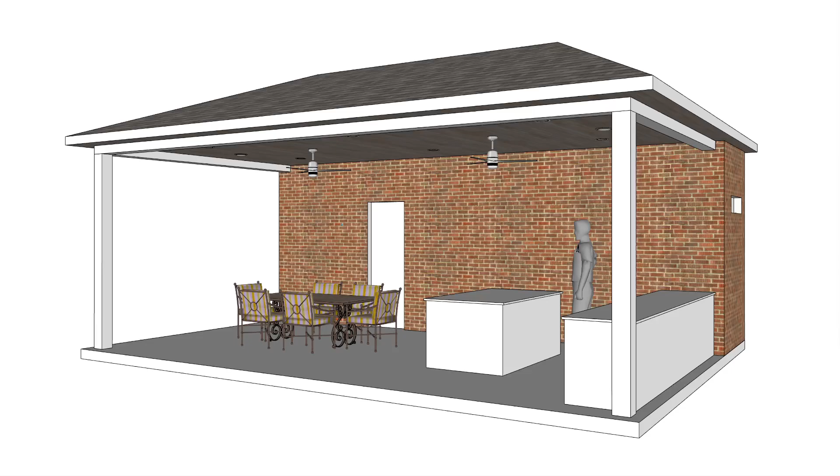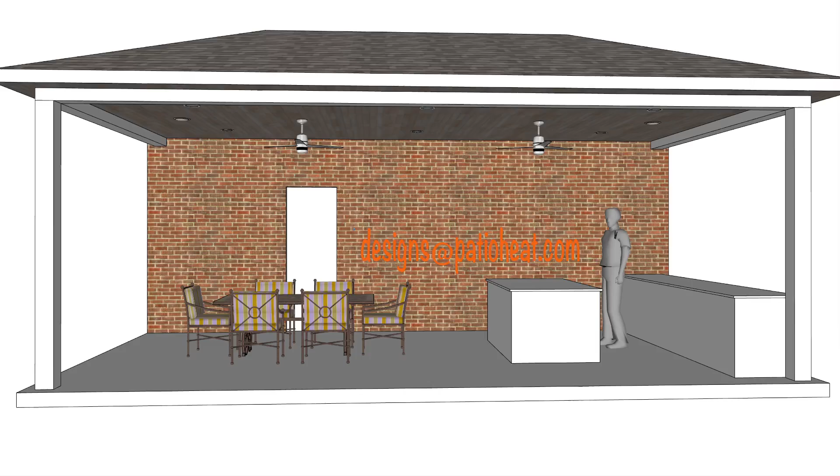All right, let's go ahead and take a look at this application. This is a residential application, and let's go first into the overall dimensions that I have.

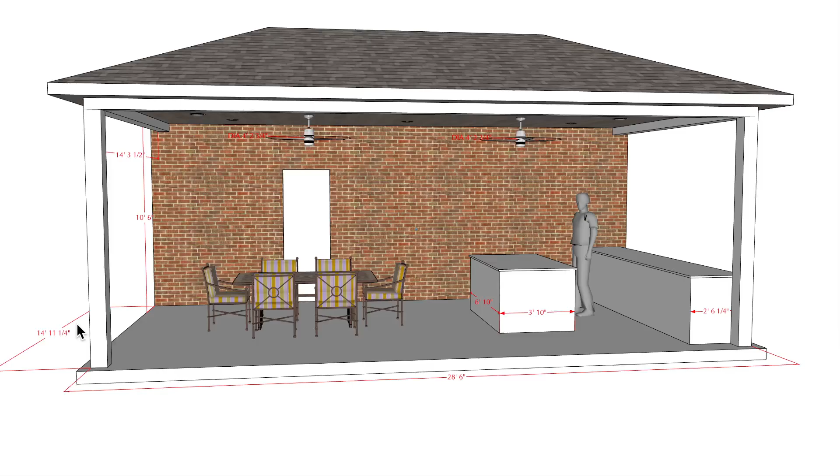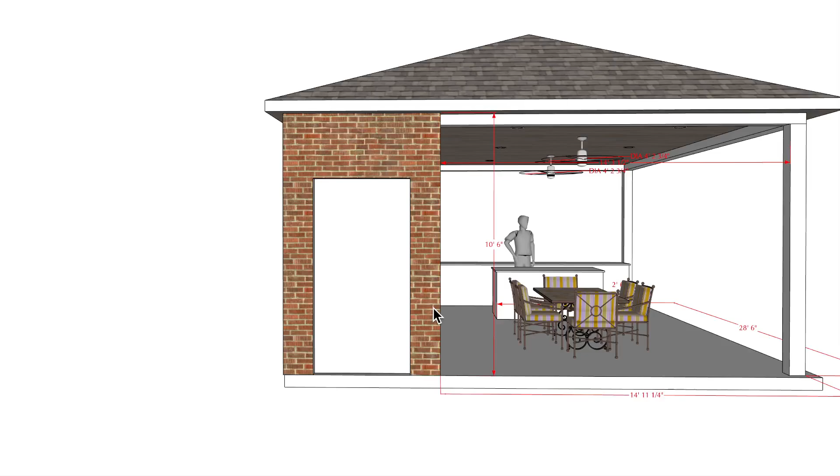So overall dimensions I have here at 28 feet 6 inches to the outside edge of the beams coming up here, or posts coming up here. And then I have from the wall here to the outside edge of the beam, or post rather, roughly about 15 foot, so 14 foot 11 and 1/4. I have a ceiling height of 10 feet 6 inches to the finished floor. And then this section over here, just so you can see, I have it at 14 feet 3 inches from the inside edge of the post to the inside edge of this wall here.

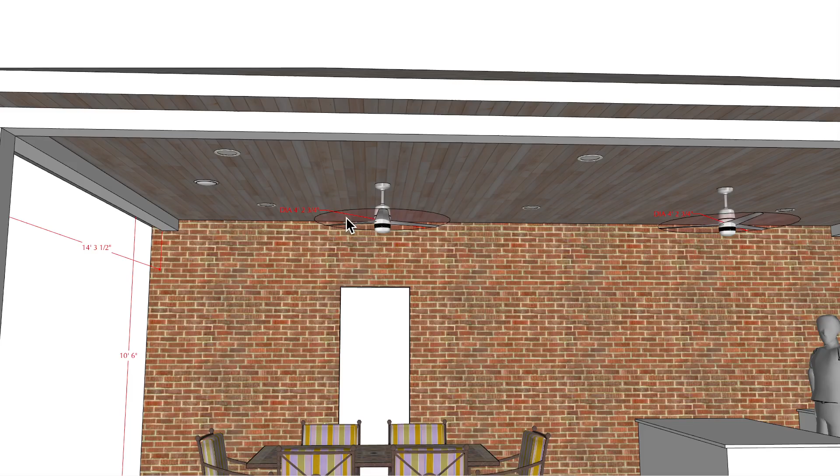The fans - they told me there's going to be fans located, 2 of them, in the patio structure itself. I have them at 11 foot center to center, so 11 foot from here to here. And the dimension I've made up is 4 foot 2 and 3/4 of an inch in diameter. Also, there's 6 sets of recessed lights as well as a speaker. I'll show you why I placed the lights and the speakers in the positions that I did here in a minute. I think that's about it.

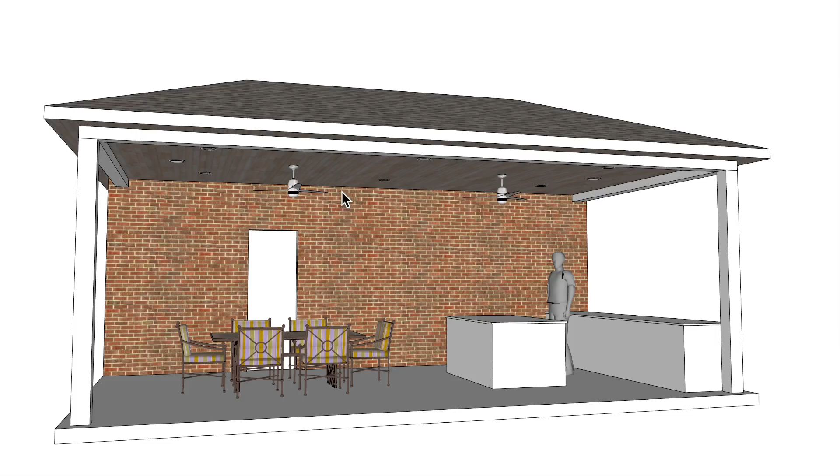So let's go ahead and turn that off and look at what I would recommend. They want flush mount units, but this is where I would place them. So these are the flush mount units. I have placed them here in the ceiling, and I want to go ahead and take off that ceiling so we can get a better look at why I'm going to do what I'm going to do here in a minute. So these are from here to here.

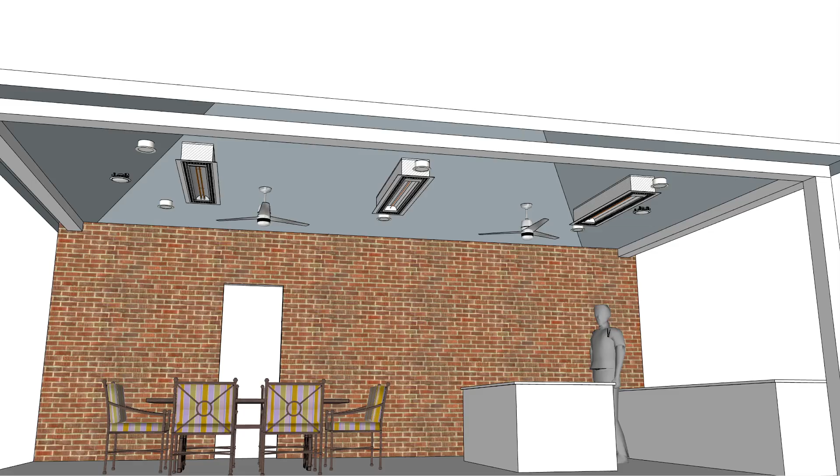I have this at 8 foot center to center. Let's see if I have those distances on here. So yeah, you can see that I have from the middle of the heater to the center of the heater, and this heater is centered within the patio structure itself.

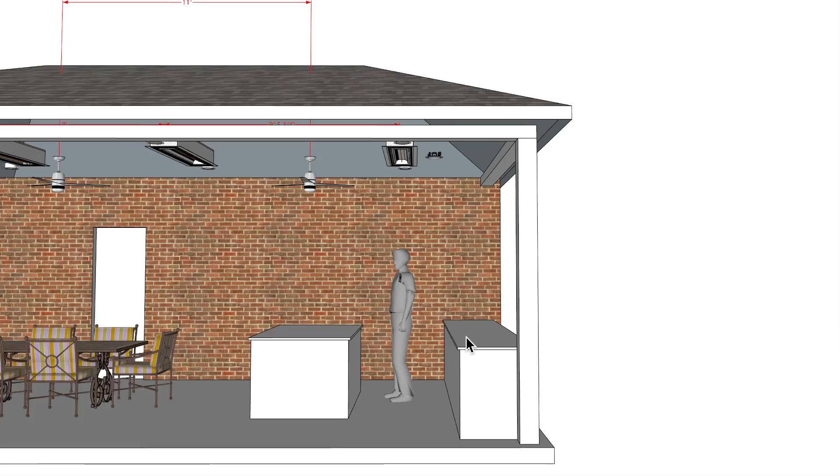I have that at 8 foot, and then from here to here, I have this at 9 foot 5 and 3/4 of an inch. The reason why I have that is because this is standing room over here between the 2 counters here, and if you were to place them at the same distance apart from each other - let's just go ahead and move this over here to the left, roughly 8 foot - you'd be heating up most of the counter space itself. Let's go ahead and turn that layer on so you can see. So we're putting almost half of the infrared light wave onto this countertop area here. So that's why I am choosing not to do that.

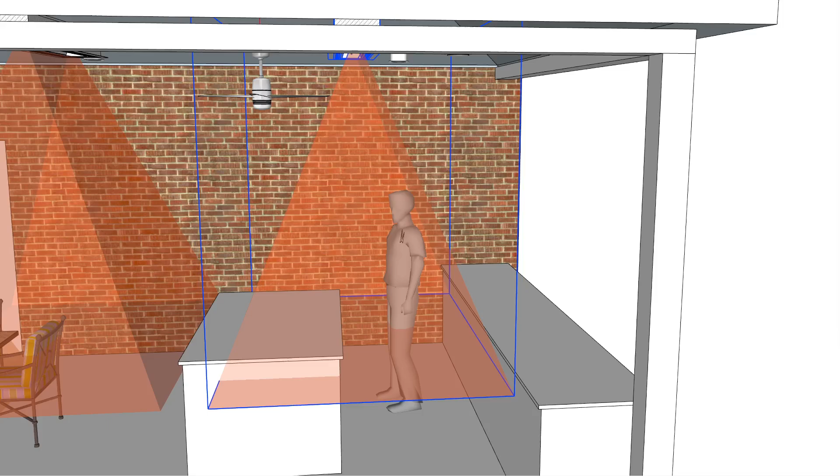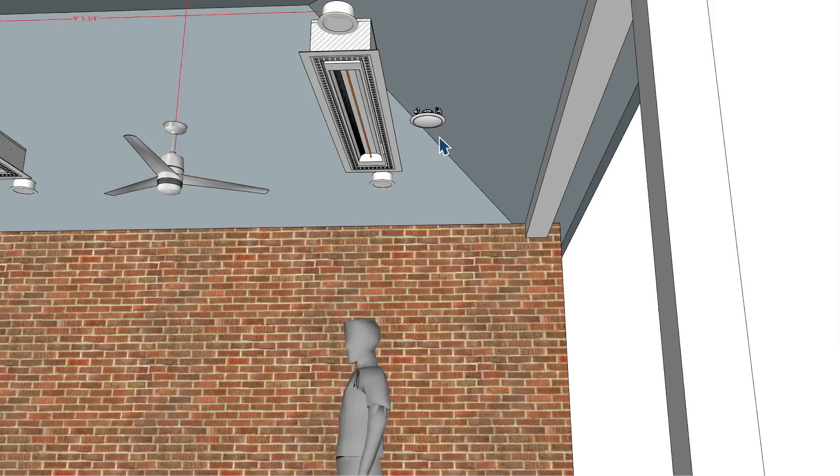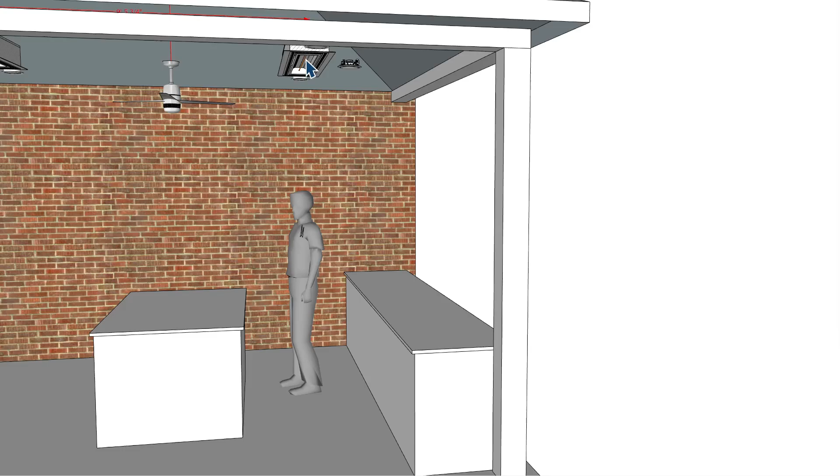So let's go ahead and put that back where I had it here for a second, and look at some of the other things we'll talk about. This is a 4,000 watt unit. The reason I'm choosing a 4,000 watt unit here is because this is basically standing room only. And if you were to use a 6,000 watt unit, then yes, you could, but you really want to have a control panel to where you can dim this down. You would probably never use it at full power unless it's extremely cold at some point. But I'm using this as a 4,000 watt because if you're sitting here at this counter cooking and serving things of that nature, then it would be probably way too hot at a 6,000 watt unit.

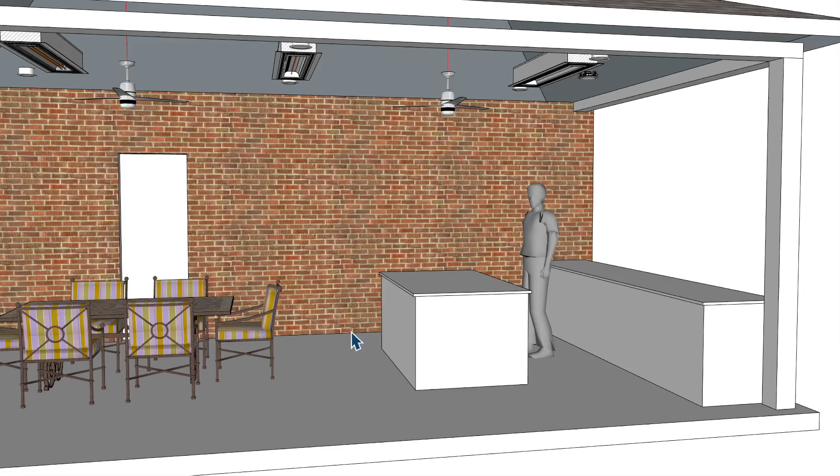Now this one here, I'm not 100% certain if there's seating positions over here or not. I moved this table - I did have it placed in a 90-degree opposite direction, but there might be bar stool seating height over here. And if you were to take bar stool seating height, let's go ahead and just throw a bar stool in here for a minute. Give me 1 second here.

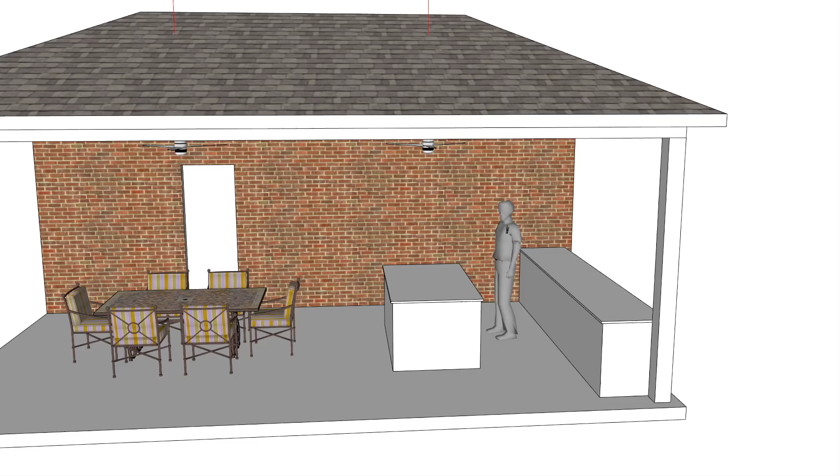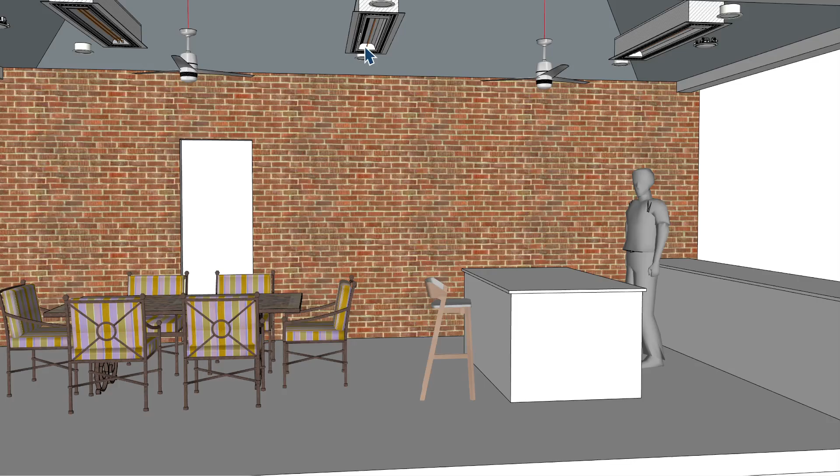Let me throw something in here real quick. If I was to put a bar stool here and you were sitting here, you can see you're sitting much higher than in a normal table-type position. So you're closer to the heater, and that intensity is going to be much more hotter. So you definitely want a control on a 6,000 watt unit, and you can see this is a dual unit 6,000 watt, or a 4,000 watt if you're not going to use a control. That's just something to note.

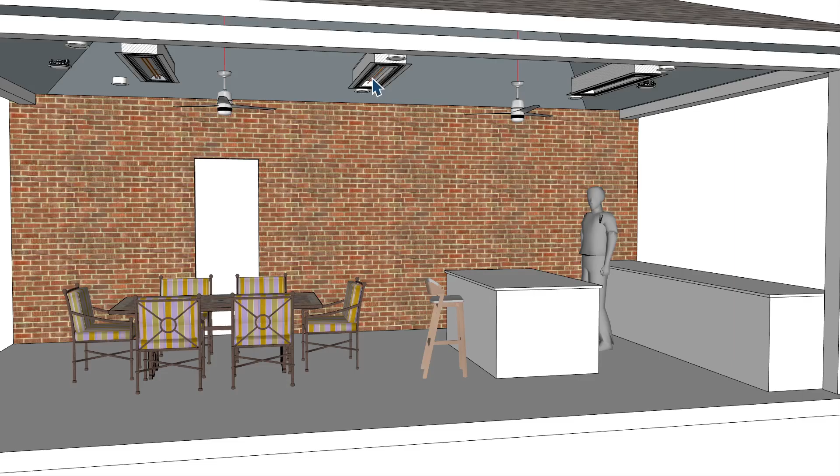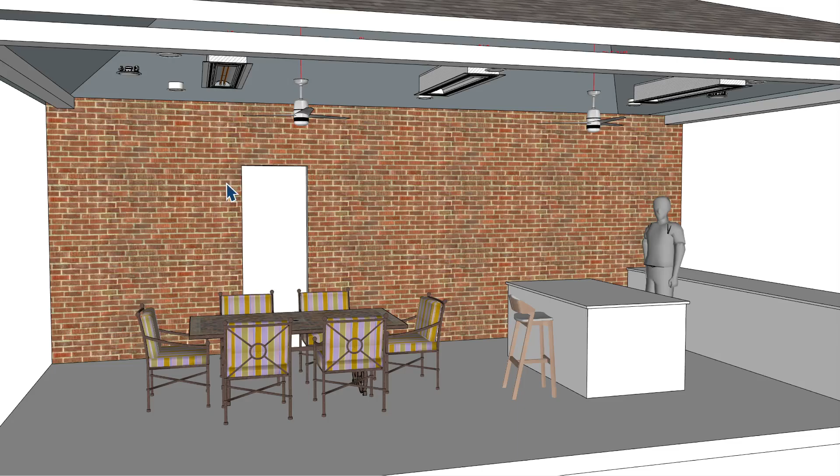4,000 watt at the 10 foot 6 inch mounting height is kind of pushing it for bar stool seating, so I'd probably want to go with a 6,000 watt heater here and a control system. If you utilize this with a 6,000 watt unit, a control system is kind of a must. 6,000 watt here, sitting in a normal dining space at 10 foot 6 off the finished floor is probably ideal, and you'd use it at the higher output. A control system really makes the whole system comfortable for whatever weather and temperatures you're experiencing. Now let's look at this issue with regards to the fan location.

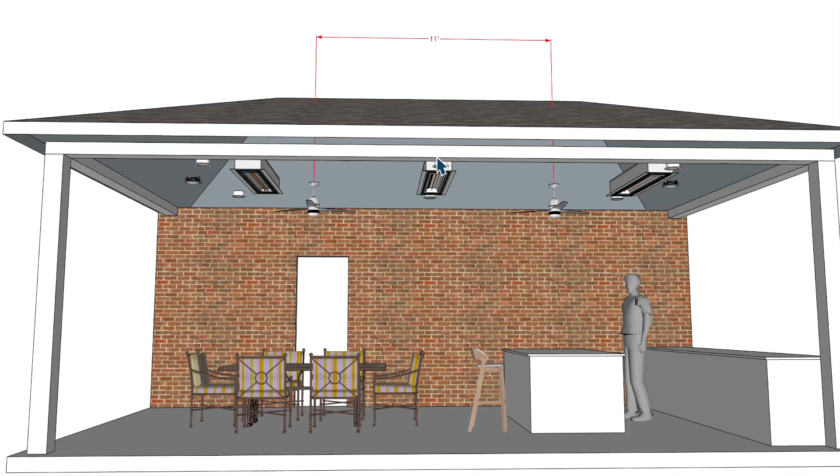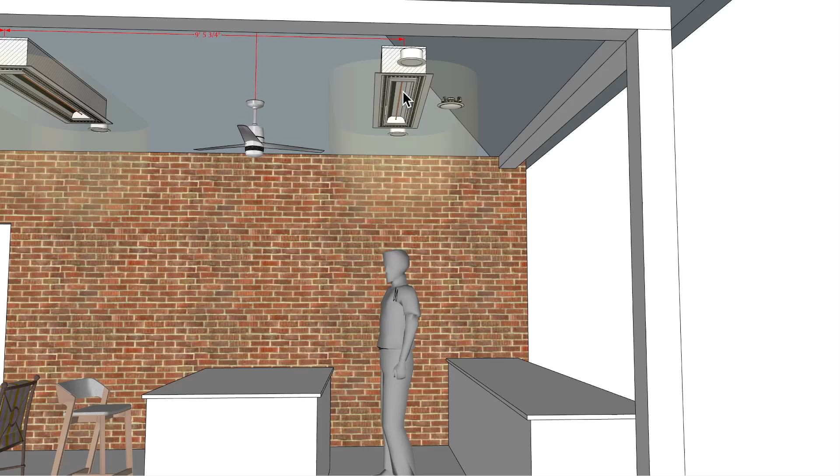You can see I have this at 11 foot center to center from the middle point here, but we are not meeting the clearances to combustibles on this particular heater. I had this one placed further over, 9 foot 5 inches, because I'm in the center of this space, and that's why I have this speaker over to the right a little further than the recessed lighting. So the only thing I could recommend, if this placement is appropriate for the heaters, is to move these fans over roughly 15, maybe 18 inches. Let's go ahead and show you what that would look like.

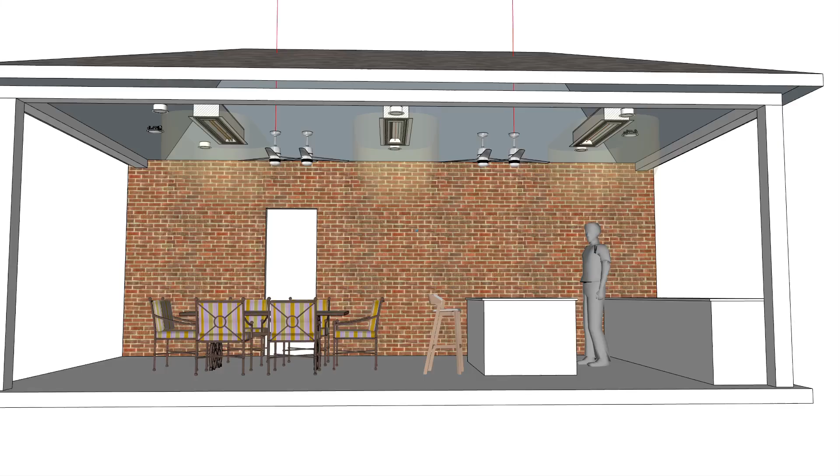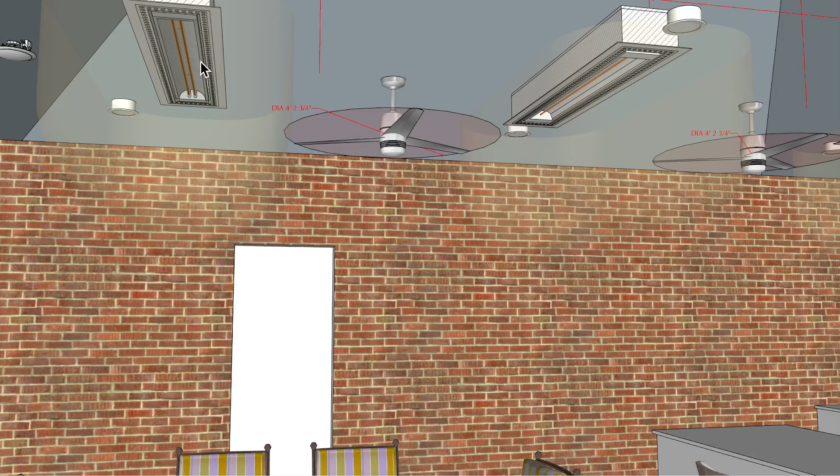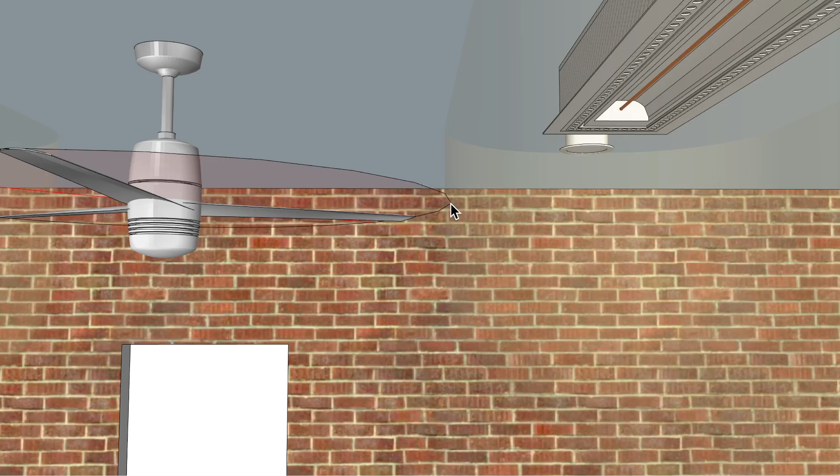So here we go, moving that fan over, and now we're in the clearance area for the heaters themselves. I have this at a 4 foot 2 3/4 inch diameter, and we are right at that clearance edge, which is 18 inches from the heater edge - not the flush mount kit, but the heater edge itself - to the edge of the fan. There's enough room over here as well, but you do need 18 inches from this edge to the fan. That should be okay with how I have these placed at that 8 foot. Of course, over here that's not an issue, but it is something we have to make sure we're meeting.

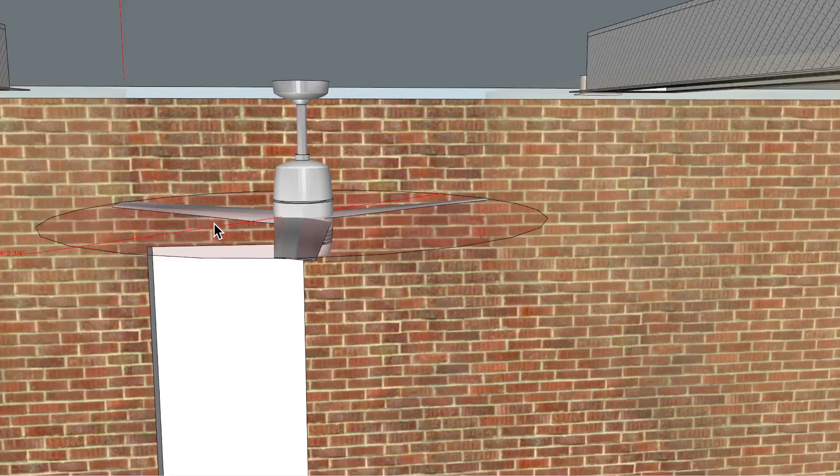So let's go ahead and look at the distance I have on these, so we have that information. Like I said, I think I just moved it over about 15, maybe 16.5 inches, something of that nature. But you can see, yeah, I have it at 8 foot 1 inch center to center on those, and that should work out just well.

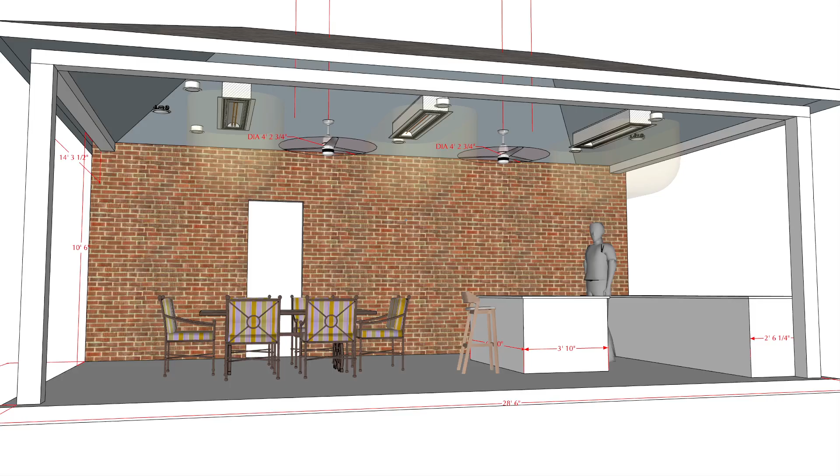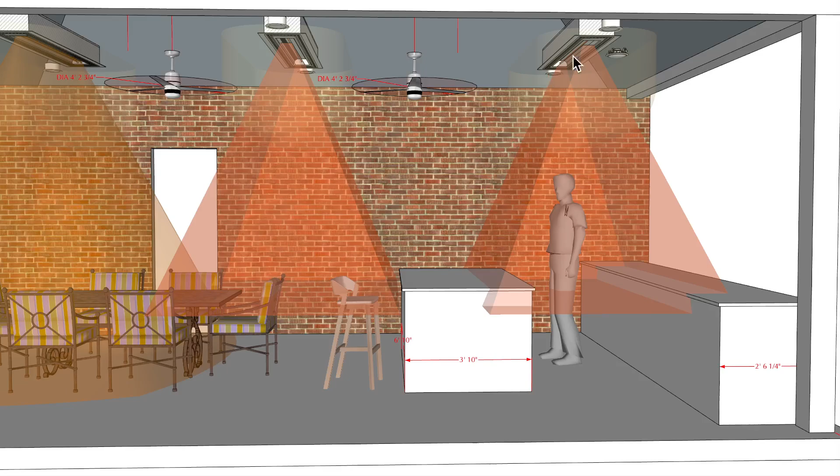Now let's go ahead and look at the footprint of heat. With a 6,000 watt, it's really designed for this seating application over here. It's not going to be so well for this particular spot, but it would be okay for this position. So you might consider utilizing a 6,000 watt here, a 6,000 watt here, and a 4,000 watt over here. But if you're going to have this as bar stool seating height, you definitely want to be able to control this particular unit.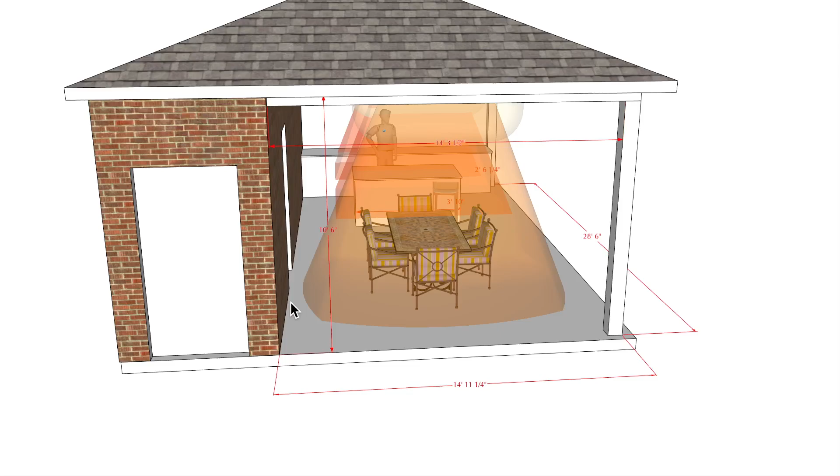So I think that's about it for that. You can see that our footprint of heat is going to cover the majority of the space here. This footprint is about 12 feet wide, so if you're occupying the space over here on the outer edge, it's something that we need to address. But I'm assuming this is going to be kind of what the seating arrangement is going to be like.

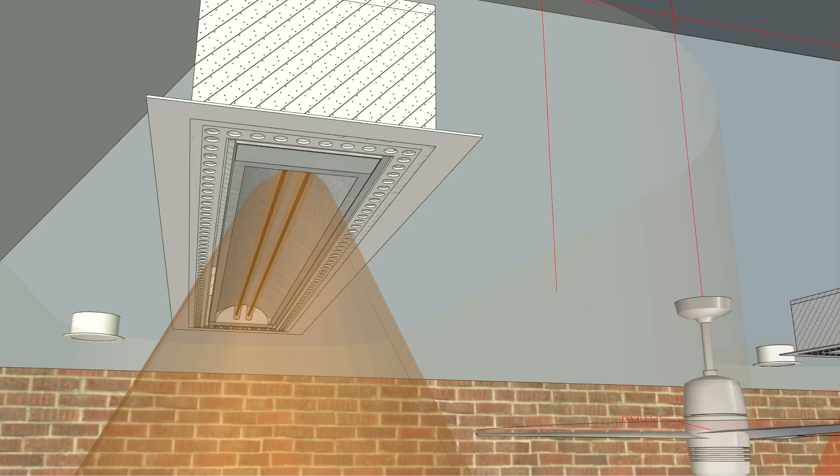So lastly, let's look at the flush mount kit itself. I'm going to go ahead and turn off these clearances, turn off some of these dimensions and distances here. So what you have is the flush mount frame itself, which is this blue section, and then you have this 5/8 drywall, which is going to be located inside of the flush mount frame. And then you have the unit itself.

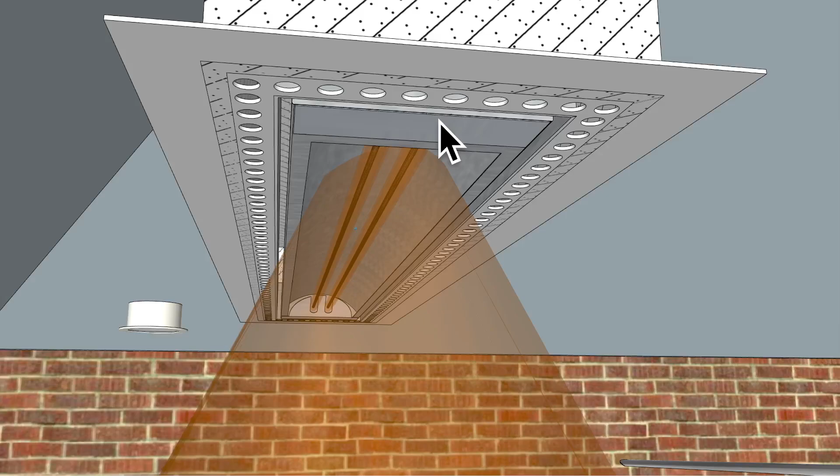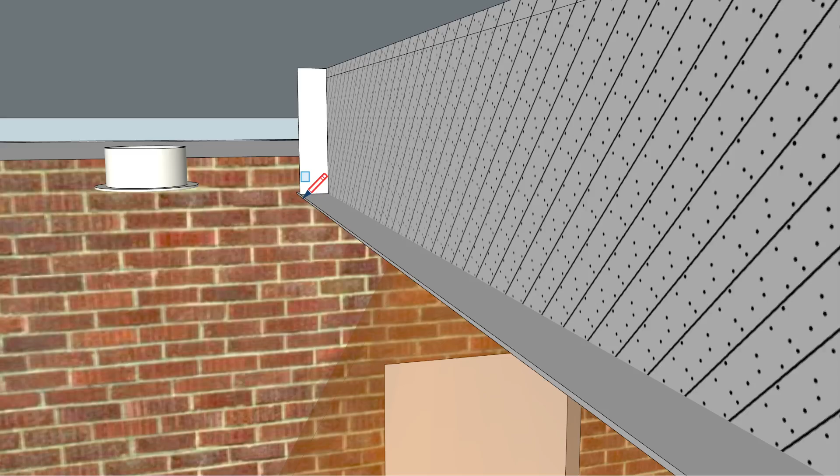This is going to be a WD6024, 6,000 watt, 240 volt, 25 amps. And then you have the frame, your structural frame. It's going to be something like this, where you're going to have something like an 8 by 2 piece of lumber, and that's going to come across, possibly all the way to the edge. I don't know exactly how that structure is going to look, but let's go ahead and just make this something that looks like what it would look like.

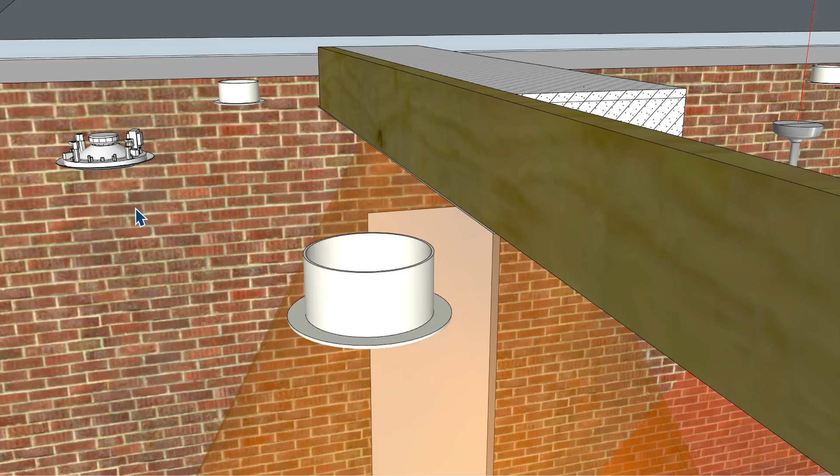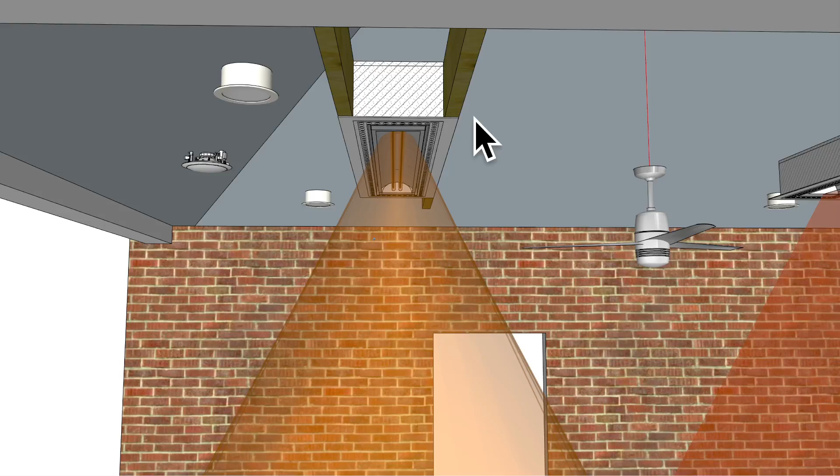So this would be the wooden structure itself, or framing around the unit. So you'd have the frame, and then you'd have this placed over here as well. And then, of course, this is going to go all the way over to the other side. And that's just a brief look at how you would mount the unit itself. You need a minimum, I believe it's 13 inches of distance between the two. So let's go ahead and see what that looks like here. Yeah, so we are at 13 inches minimum. Something like that, just to think about.

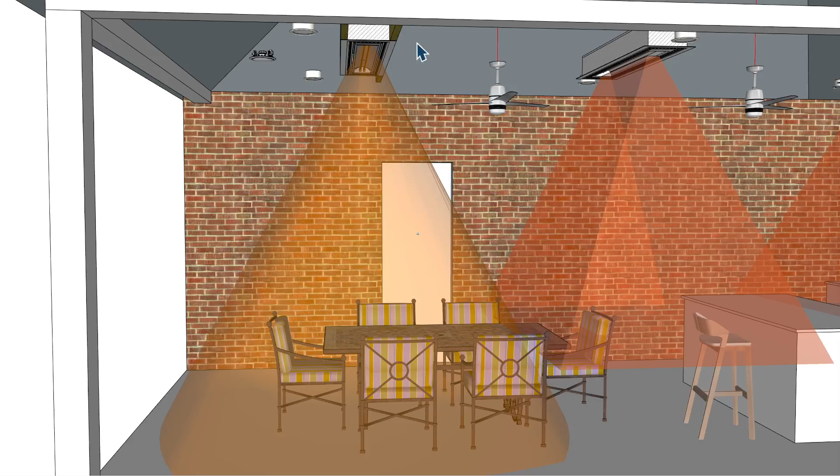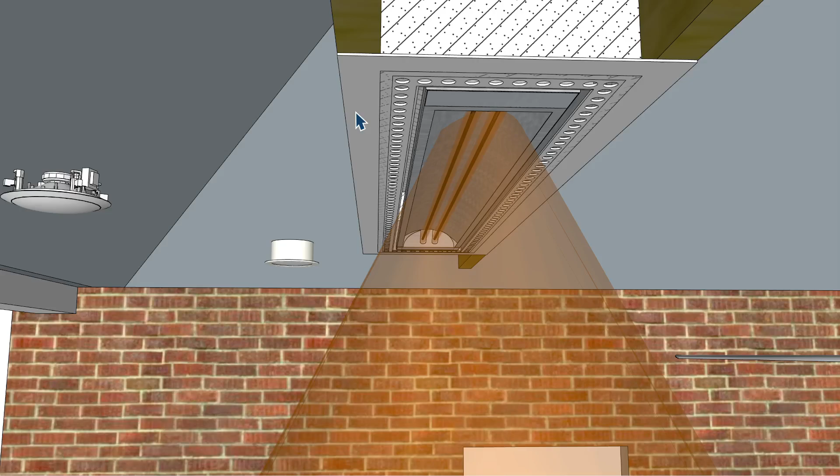Placing the units in an exact position is always best to have designed by a structural engineer prior to the actual construction itself. Also, just to note, you have the flush mount frame. You can put a stucco finished ceiling on this, or even a wood finish combustible ceiling.

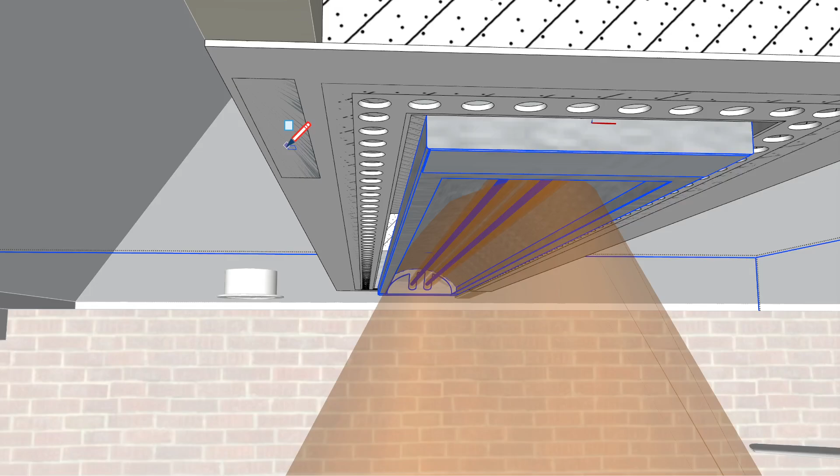If it's a combustible ceiling, you need to move the heater down. There are brackets that allow you to lower the unit based on the height of the wood structure. But let's just say you have some tongue and groove, something like this, and I'll make this maybe a half inch, and then we'll throw some wood finish on it here.

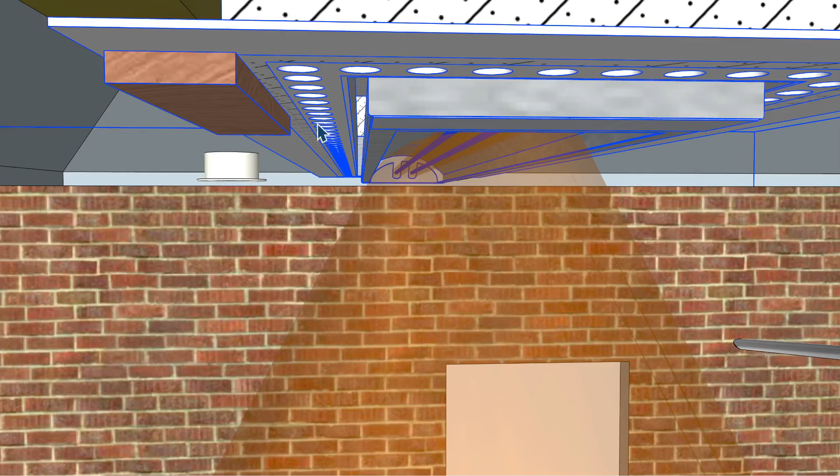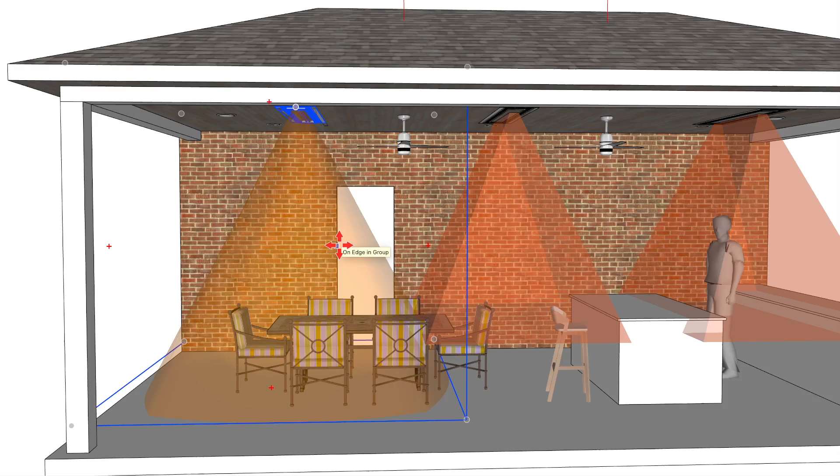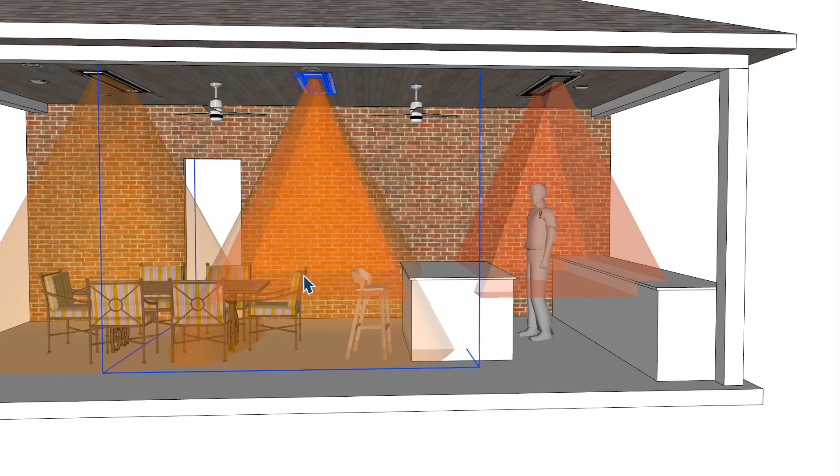Now let's get heating. Ceiling back on here. And again, look at that footprint of heat. So if you had this, again, a 6,000 watt unit, it's going to be identical to this footprint here. If I was to move this over 8 feet, you can see that footprint is very nice for this sitting position over here. But again, this is going to be a lot hotter for bar stool dining, and way too hot for standing over here. So if you had all 6,000 watt units, that's fine. You just need to make sure that you have a control system for that.